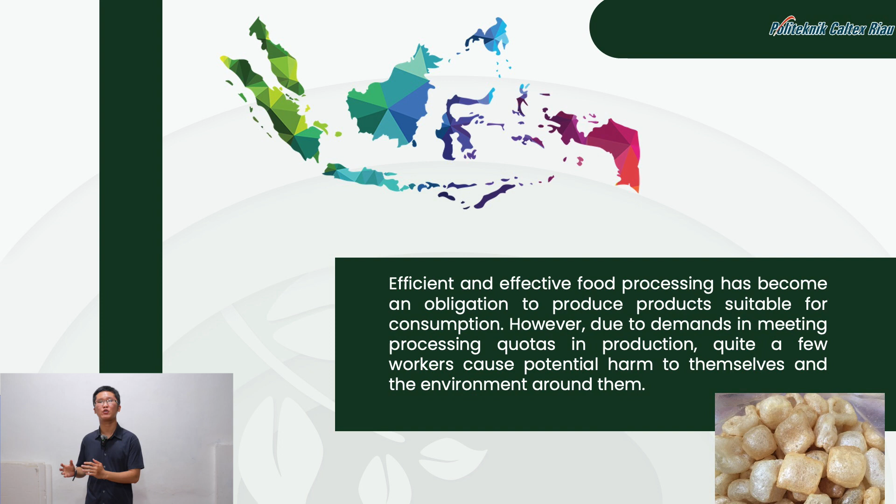Jangek crackers, a traditional Indonesian cattle skin cracker, is considered to be a culinary delicacy in West Sumatra and known nationwide. Unfortunately, most small to medium enterprises in this industry are equipped with little and less advanced technology. As a result, production is less efficient and puts the risk on the workers. Moreover, these are the typical errors found in most productions.

Our team has designed a system to counter this problem. This machine is capable of cutting cowhide using an automated pneumatic powered blade with a press of a button. The system itself brings benefits in comparison to conventional methods. This machine brings several benefits.

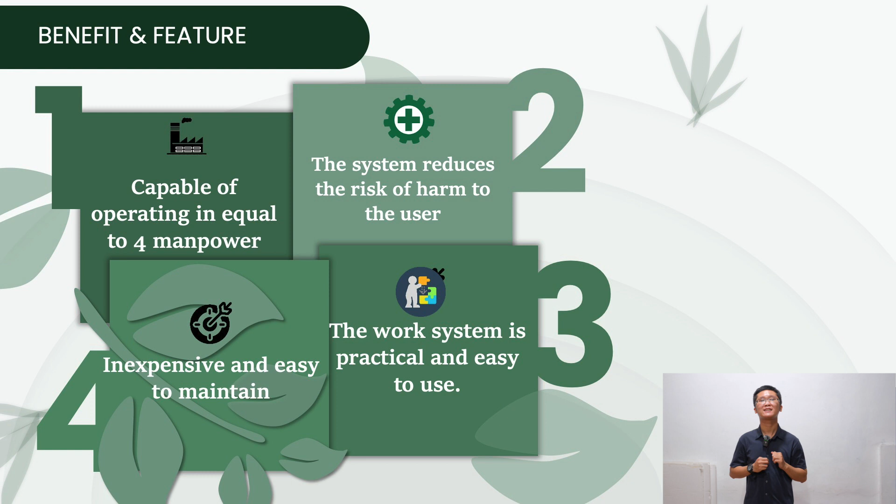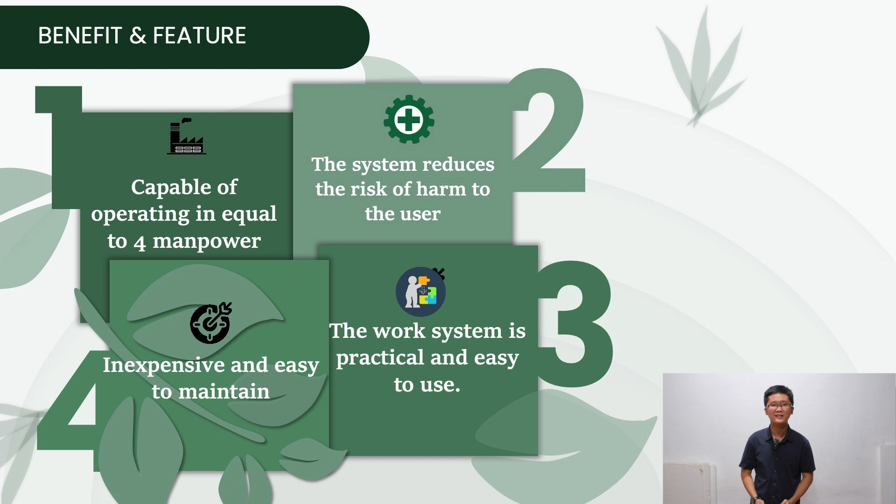The first one, it is capable of operating equal to 4 manpower. The second is that the system reduces the risk of harm to the user. The third one, the work system is practical and easy to use. And the fourth one, it is inexpensive and easy to maintain.

The mechanical implementation consists of several segments. The first one being the pneumatic cylinder, second being the blade, third the body, the fourth press, and lastly the safety gate. So, firstly, the pneumatic cylinder, which acts as the actuator itself. The second one is the set of blades sized 270 times 170 millimeters, and cubes are sized to 10 by 10 millimeters, which cuts the cowhide into perfect size cubes.

And thirdly, the body itself has a dimension of 400 times 300 times 600 millimeters and is designed to drop the cubes directly into the designated spot. Fourth, the press is designed to push and fit the blades below. And lastly, the safety gate is equipped with a limit switch sensor.

Going on with the work system itself, as I've mentioned before, since the safety gate is equipped with a limit switch sensor, the whole operation itself will not work if the user is not in a safe position. The example is if there is anything in the proximity of the blade, like the user's fingers.

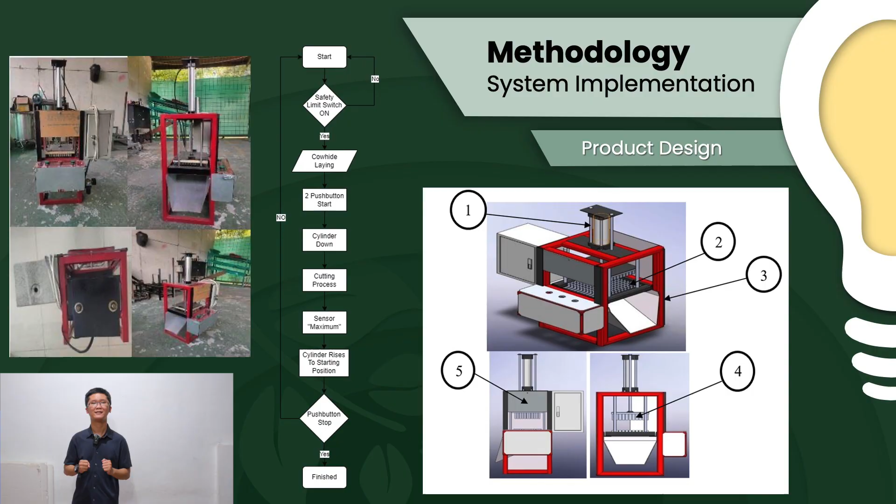If it is designated safe, we can now press the push button, and the cylinder will descend, hence cutting the cowhide. After the blade has fully descended, the cylinder will automatically rise, and this process will continue until we press the stop button. We've also taken measures considering the time taken for the cylinders to successfully slice based on the different pressures given by the pneumatic cylinder.

Results of the measurements of the air pressure used during testing and resulting cutting depth can be seen in this figure. It can be seen that a pressing time of 5 seconds produces an appropriate cutting depth. The air pressure used in this test is between 8 to 10 bars. In one cut, the tool is capable of producing 121 small pieces of cowhide with a size of 10 times 10 millimeters.

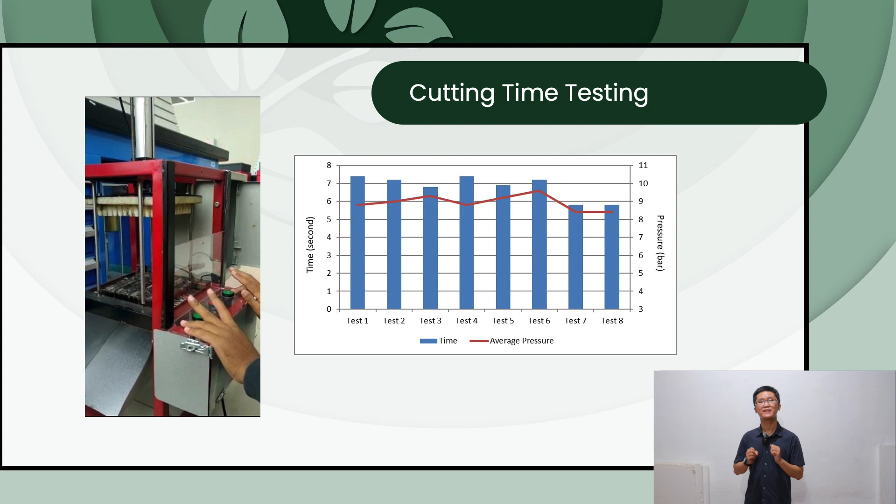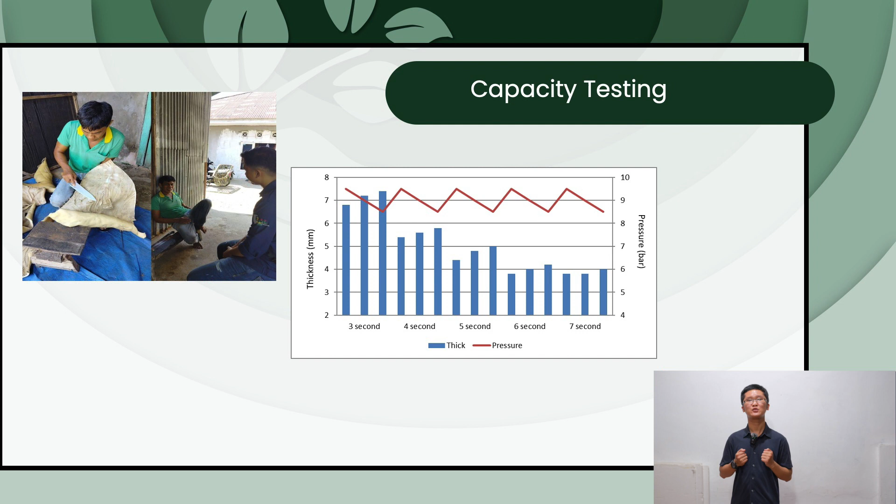From the picture, it can be seen that the cutting time for 10 cowhides varies greatly, from the fastest of 6.8 seconds to the longest of 7.4 seconds. It is assumed that the cowhide used has the same area as the total blade, namely 121 square centimeters, and this machine is capable of producing up to 64,020 raw cowhides every hour.

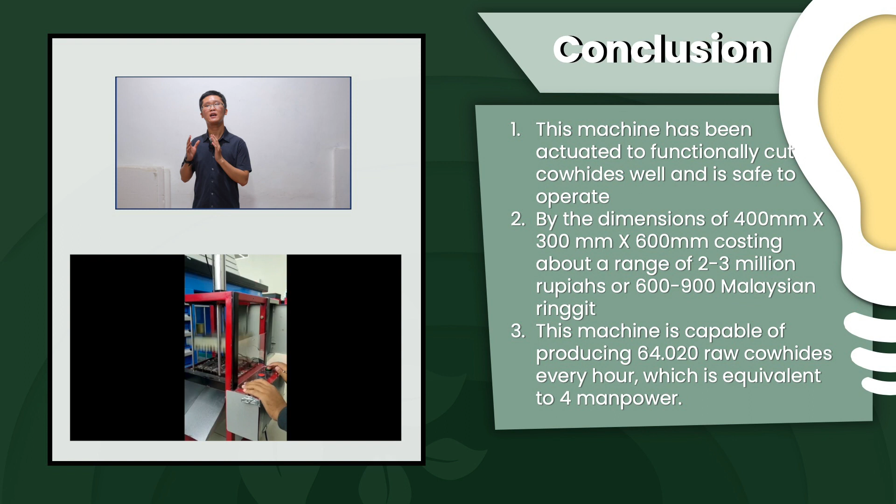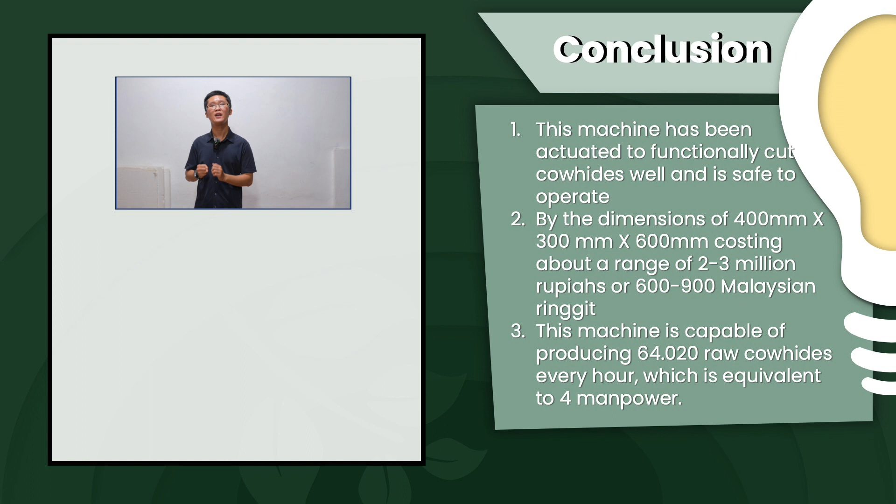From our presentation, we can conclude these several things. This machine has been actuated to fully functionally cut cowhides and is safe to operate, with dimensions of 400 times 300 times 600 millimeters, costing about a range of 2 to 3 million rupiahs or 600 to 900 Malaysian ringgits. This machine is capable of producing 64,020 raw cowhides every hour, which is equivalent to 4 manpower.